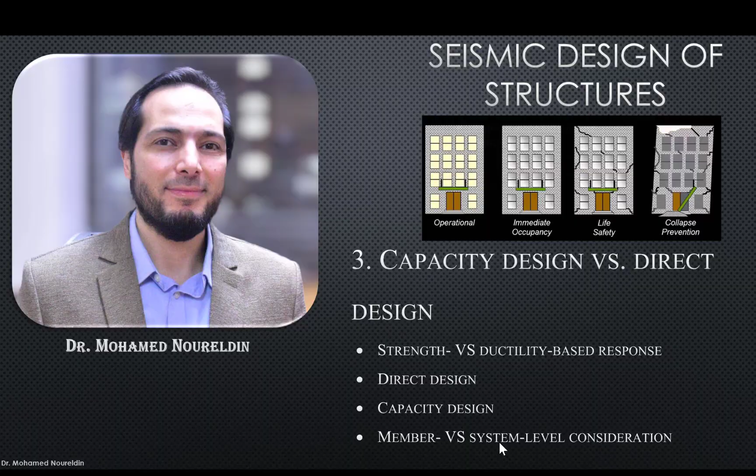Now let's talk about something else which is related to the strength versus ductility-based response. So that's our main topic for the next two slides here. A couple of slides here we're talking about strength and ductility-based response. It's another concept, you need to understand it well.

In order to give an introduction to this, we need to understand that there are different approaches to seismic design in general. Because understanding this hierarchy or these different approaches is going to give you a very good understanding of the strength versus ductility-based response. Why we use, take care of this word strength and the word ductility. Now we understand at least what is the meaning of strength, what is the meaning of ductility.

And based on these kinds of responses that we have explained before, we are going to understand the main different approaches for seismic design. And remember well that professionals and academic people and professors are always concerned with the structure response, and based on the response we can put the appropriate seismic design technique or approach.

So based on this, we are going to find that our seismic design can be categorized into two main categories. The first design approach we call direct design approach. And the second is capacity design approach. What is the meaning and what is the difference?

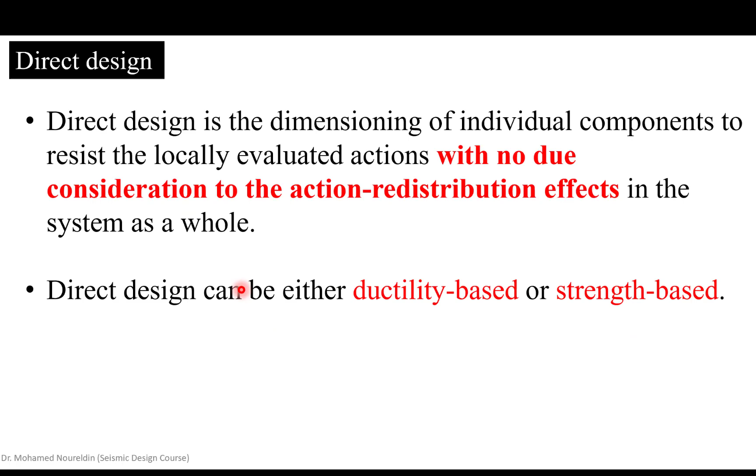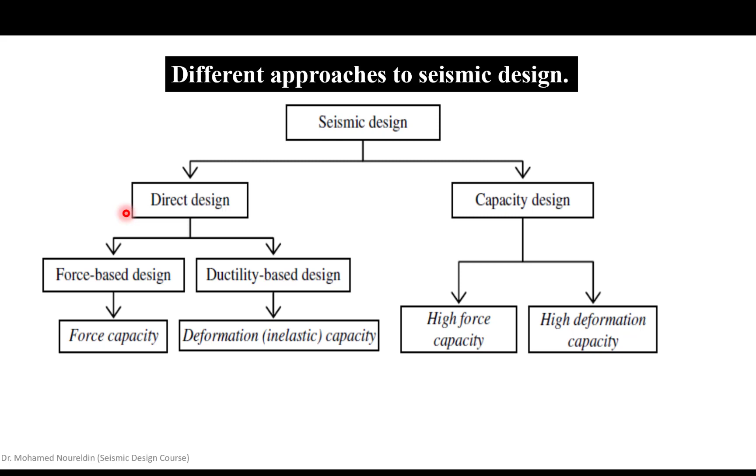Now, for the force versus ductility-based seismic design, we want to understand it more clearly. Traditional force-based seismic design has relied on force capacity to resist earthquake effects, expressed as a set of horizontal actions defined as proportional to the weight of the structure, right?

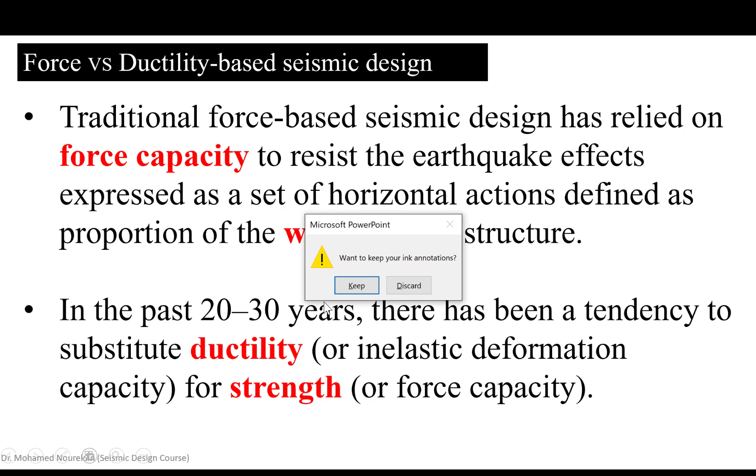And this is common actually. Whenever we are in the design stage of our structure, as I said, we put some inverted triangle. You know why it is not working here, sorry. So we are putting some inverted load, and we say this is how the earthquake is going to affect our building. And then based on the analysis, we are going to bring the moment here and here, or the bending and shear for the columns, and then we are going to design based on the force capacity.

So if the analysis gives us a certain amount, 100 something, then we're going to design the beam to be 110 or 120, and we say that we have a factor of safety of 1.2. That's it. And this lateral load is a fraction of the weight of the structure, like 5%, 10% or something like this. This is the classical way for our design.

We have another type: especially in the past 20 to 30 years, there has been a tendency to substitute ductility for strength. So we started to realize that our beams and columns can go into the inelastic range, and we can utilize the inelastic part of our elements and structures. So not only at the yield, but still we have some part here we can utilize. So why not? This needs to be described by ductility.

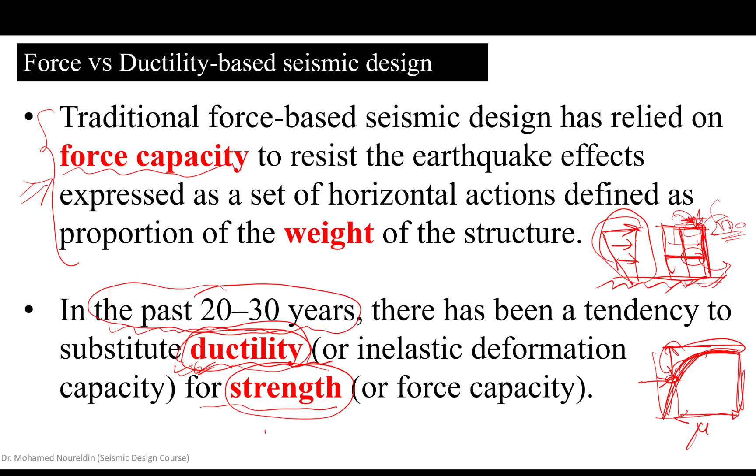So in the last almost 30 years, there has been a tendency to use ductility instead of strength, because ductility is going to be more economic in one point. The cross sections are going to be lighter, but it needs more workmanship.

Okay, so if we want to summarize why we have used strength-based in comparison with ductility-based, here the word uncertainty comes. Let's read this. It is developed, strength-based, in recognition of the great uncertainty associated with estimating seismic demands.

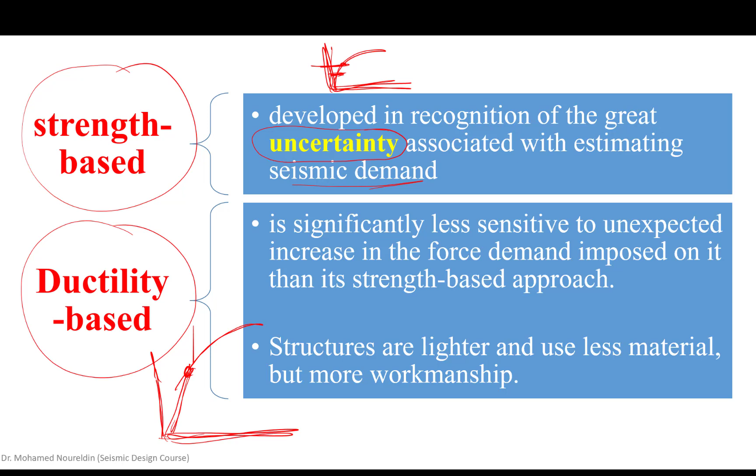And this is true. If we have our structure pushover curve here, and this is the yield point here. Whenever we are designing our structure, we say that our structure is going to be here. Let me put it in a bigger space. Okay, let's have this. This is better. So if we say this is the yield point, then our design level is here. This is the design level. But the yield level, this is V yield. Let's call this V design.

Actually, because we do not know how much force is coming from the earthquake, there is an uncertainty involved with estimating the seismic demand. So we are using some factors that are highly overestimating the seismic demand. So this inverted triangle is highly overestimating the seismic demand. The seismic demand is supposed to be far less than what we are using. Based on this, we use the strength-based to counteract the uncertainty involved.

Okay, as if someone doesn't know exactly how much he should pay for a certain service, for example, then he pays a huge tip or a huge amount of money. This is the same strategy. But after 20 or 30 years, we realized that it's not like this. We need to be more economic in the way we look at our design.

So ductility-based is significantly less sensitive to unexpected increase in the force demand imposed on it than strength-based, because we are not thinking about how much force is going to come. We are talking about how much deformation is going to be induced. So we are talking about ductility, deformation, not force. So we do not care exactly how much the seismic demand would be. This is why the words less sensitive have been used here. But we care about the structure, how much it can provide, what is the maximum for the structure itself.

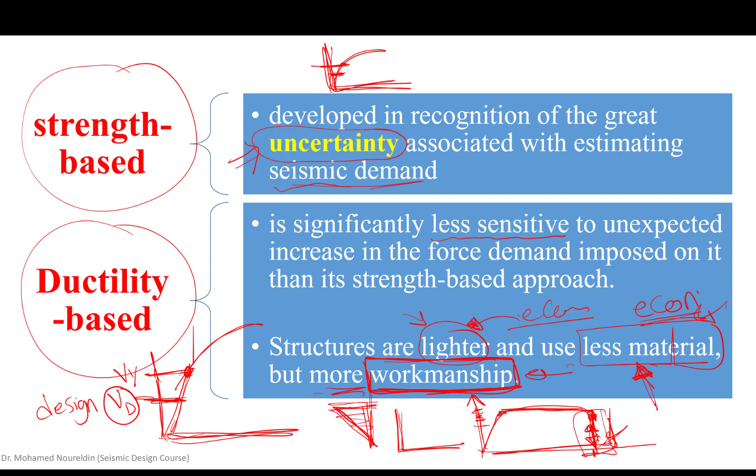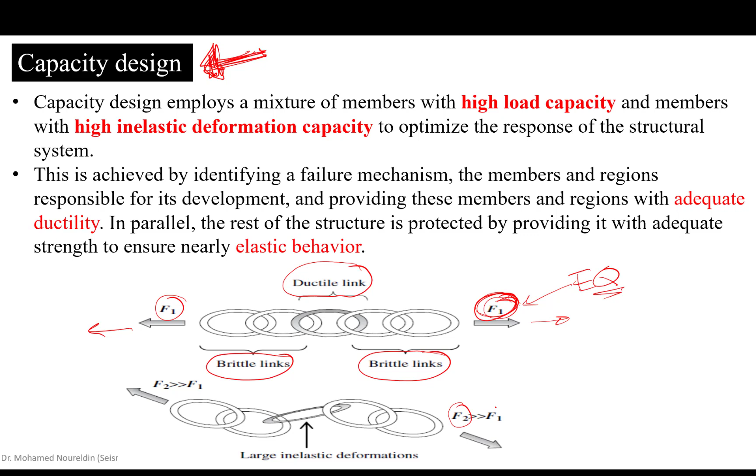We put these as brittle links. And we apply our forces, which are considered to be the earthquake. Think about the structure as the chain of these circles, and the force being applied, a pulling force or tension, is the earthquake force. What will happen? If you apply F2, which is larger than F1, from both sides, you are increasing the demand, the pulling force. What will happen to this ductile link? Exactly, it will elongate. Large inelastic deformation will take place.

However, these links are going to stay as they are. They are elastic. They are not going to break or fracture, right? So we allow more forces to be applied, and we will let this link work with its own capacity, but we are going to allow this ductile link to deform in a large inelastic deformation fashion. Okay, so this is actually what will happen for our structure.

Okay, now let's read the narrative here and you're going to understand what I was saying. Capacity design employs a mixture of members with high load capacity and members with high inelastic deformation capacity. So brittle links are high load capacity members here and here. This ductile link, it is what? High inelastic deformation capacity. To optimize the response of a structural system, this is achieved by identifying a failure mechanism. This is the meaning here.

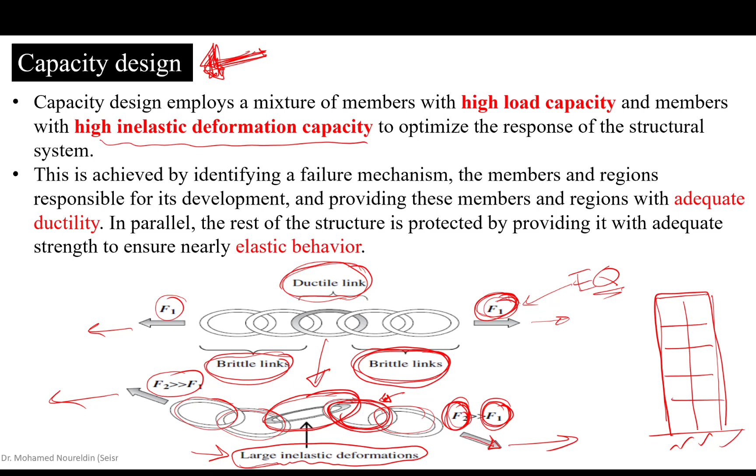Failure mechanism means that if we have a structure like this, with different floors, beams, and columns, we can assume that I want, for example, the beams at the first story to deform inelastically, and the columns at the first story to deform inelastically. This is what I am designing for. I want the mechanism to take place here. So I'm going to design the three columns here to be ductile, and these beams to be ductile. So they are going to be the ductile link for me.

However, the other columns of the remaining floors are going to be the brittle links. We will not provide them with detailing, we are just going to design them based on the capacity: what is the force applied and what is the capacity that they should consider. Okay?

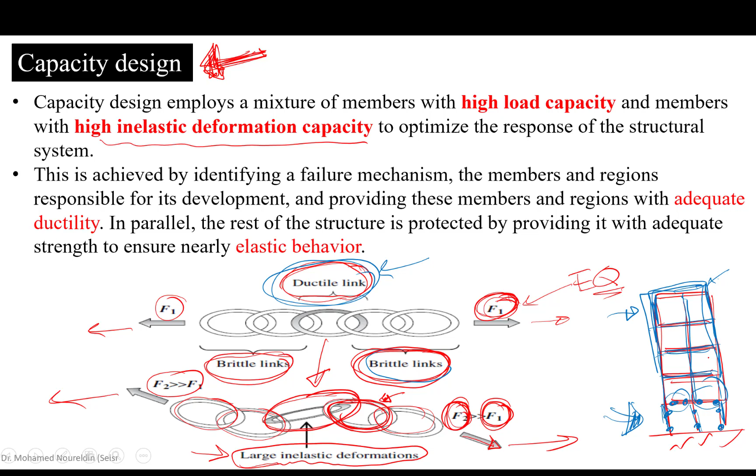Okay. This is achieved by identifying the failure mechanism, as I said, the members and regions responsible for its development, and providing these members and regions with adequate ductility. In parallel, the rest of the structure is protected by providing it with adequate strength to ensure nearly elastic behavior. So we have elastic behavior in all other members. Okay, let's go to the next.

Let's have a comparison between direct and capacity design. This example is only for illustration; it's not a real numerical example, only for explanation purposes. So first of all, we have a lateral load being applied on a frame, as you can see. We have gravity loads here, and we call these the applied actions: gravity loads, and lateral loads coming from the seismic design based on the equivalent static force method, for example.

Under these loads, we are going to make our structural analysis, and we are going to find that at this particular beam at the first floor, we need a required moment with the magnitude of MB, for example. Okay. Now these are considered to be the design actions.

In case of the direct design, we simply say, if this is MB, then the moment in the first column is going to be MC11, and in the second floor column MC12, where C1 means first column and 2 means the second floor. So we need these three different moments to fulfill the equilibrium equation of the joint, which means MC12 plus MC11 plus MB equal to 0. This means the equilibrium of this joint is maintained.

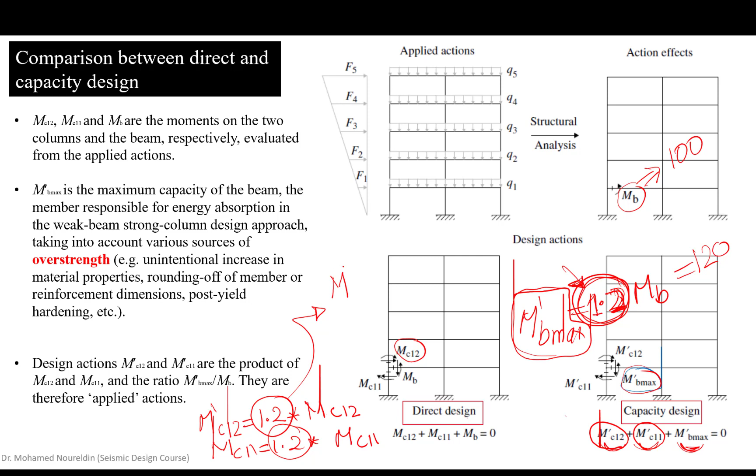Actually, this M prime C12 is going to equal the same factor, which is 1.2 times the original MC12 that was already here. Okay, and M prime C11 equals 1.2 times MC11. Okay, this is only a ratio that I have put. It is 1.2, but actually this 1.2 is what? Exactly, it is MB maximum over MB. This is the overstrength factor that we are going to talk about.

Okay, so based on this, you're going to find that the actual actions that are going to be used for the design of columns in the capacity design approach are going to be higher than the magnitude of the moment required for the design in the case of the direct design for the columns. And the beam is going to be designed under the capacity design approach using the overstrength factor, which is higher than the required bending moment from the structural analysis.

How much? What is the ratio between MB and MB maximum? It is going to be the overstrength factor. MB maximum equals 1.2 times MB. Okay, so this gives us the meaning of what I have said here. So this is MC12 and MC11 and MB. They are moments on the two columns and the beam respectively evaluated from the applied actions. These are from the applied actions.

However, M prime B maximum, which is this one, is the maximum capacity of the beam, the member responsible for energy absorption in the weak beam strong column design approach. So under this approach, which is the philosophy of our design, we're going to allow the beam to deform with plastic hinges at the ends, taking into account various sources of overstrength. Where does overstrength come from? Unintentional increase in material properties, rounding off of member or reinforcement dimensions, post-yield hardening, etc. So we have different sources for overstrength.

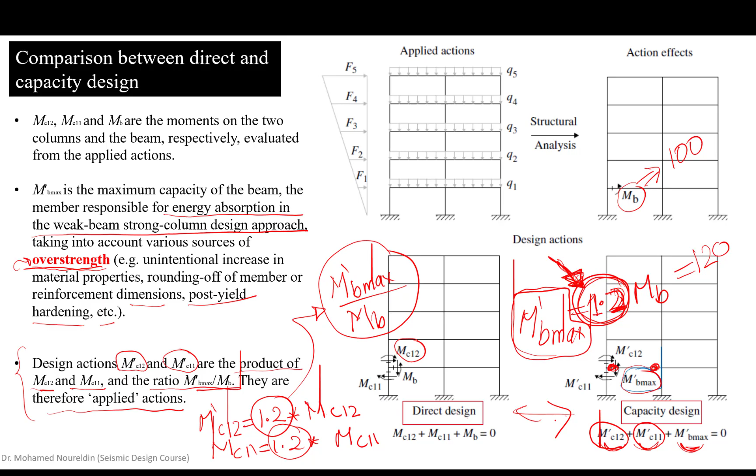Okay, 1.2 is only a number that I've used, but anyway, it might be larger than this number, or maybe less. Okay, so that's the meaning here. Design actions, which are M prime C12 and M prime C11, are the product of MC12 and MC11 and the ratio M prime B max over MB. They are therefore applied actions. Okay, so this example really shows us how the capacity design works in comparison with the direct design. Now let's go to the member versus system level consideration.